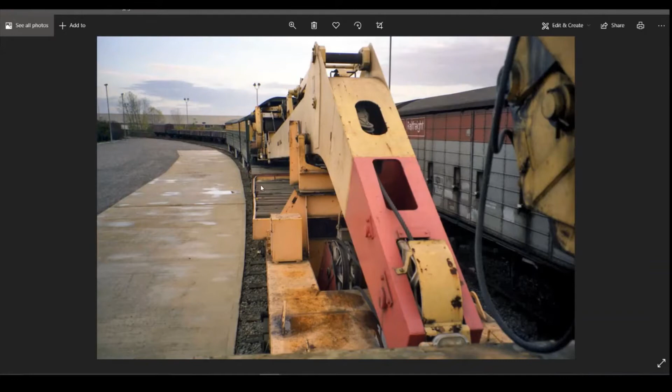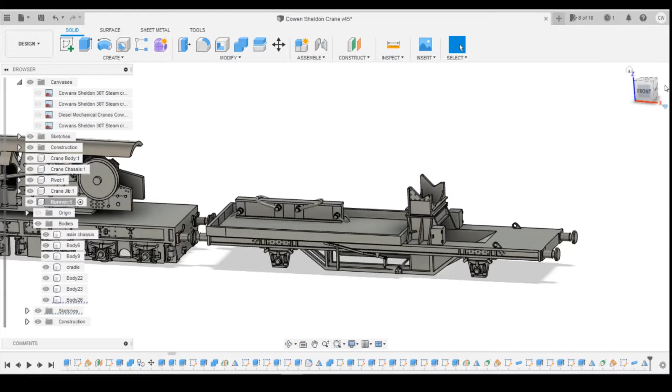In today's lesson, we're going to fill up this hopper here. If we look at the photos we've got, it's pretty much filled with bits of old sleeper that they're using for jacking points. Some are stacked relatively flat - I've got a picture from above showing they look relatively flat, but there are a couple at different angles, so I'm going to show you how to create that sort of random effect. They're not full width sleepers either, they're half width, so they only go maybe halfway across. There's a bit of a gap down the middle, about a foot wide, and they don't fill this whole area up either.

So we're going to start by creating separate bodies, then we'll be copying those bodies across and combining them all as one feature.

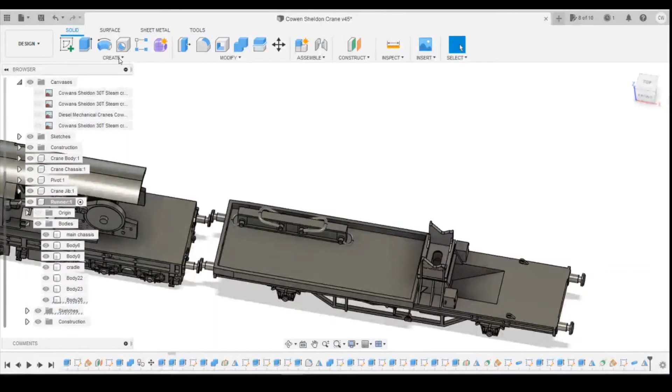If we create a sketch on this inside surface here - I've done a bit of research on the internet and found that the most common size for sleepers is 250mm wide by 125mm deep by 2.6 meters across. So doing the sums, in this corner we're going to have a sleeper that's 1.7mm wide, and I'm going to go for about 8mm in length, since they're cut down, not all the way across.

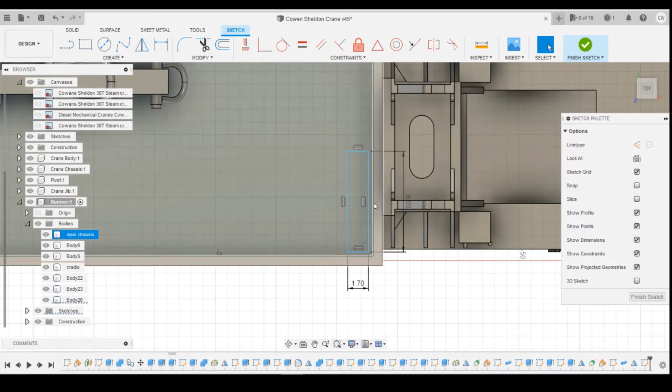I'm not worried about defining its position, it just needs to be in the hopper here. I'm going to extrude it upwards by 0.85, which will give us the rough dimension of a sleeper. Let's create a new body.

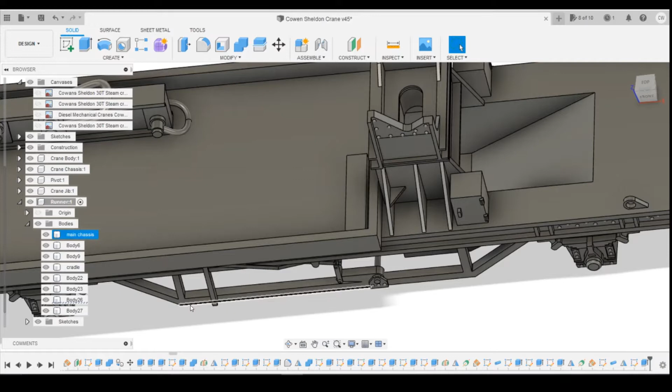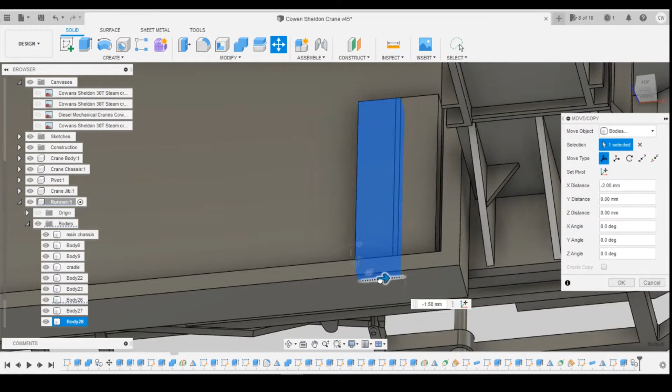Now what we're going to do is just copy these across. If we right click on the body, we can copy and paste it. Do you want them a bit closer? Maybe. You can just go along and copy these all the way down here.

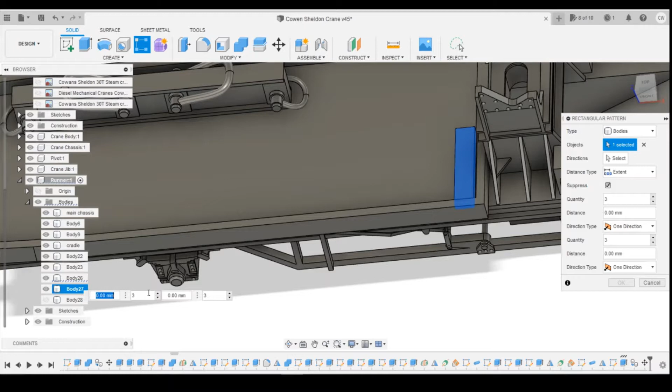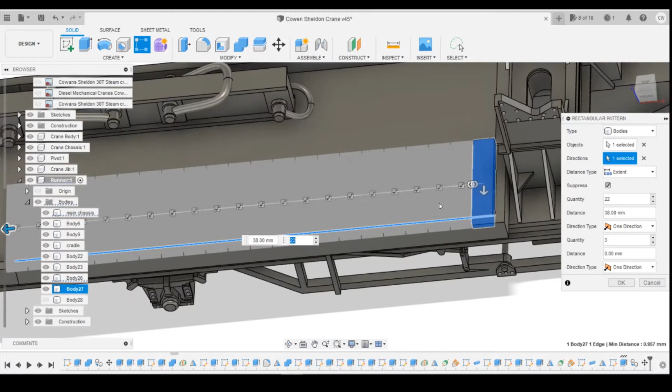The other option is to use the pattern tool to create a pattern off of the bodies. If we create that one, hide body 28 there, select the direction, and fill this up with sleepers - 22 across, 38mm, with a little gap in between them all.

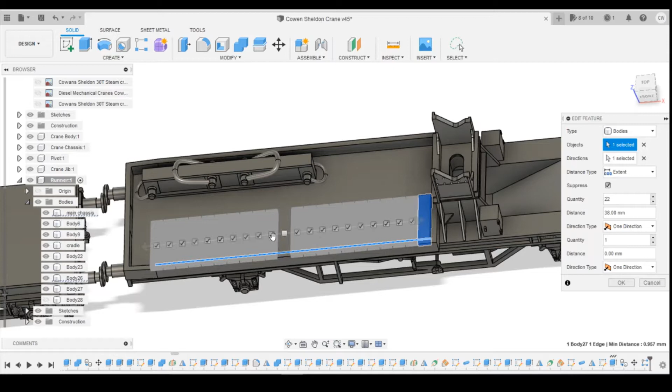Now, to create that bit of random effect, if we edit that feature, let's say we wanted to turn these two off. If we bring this body 28 back up, we can move it - drag it across like this, and then we can rotate it as well.

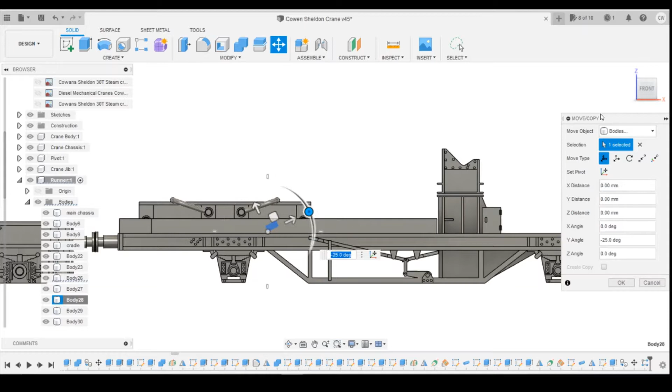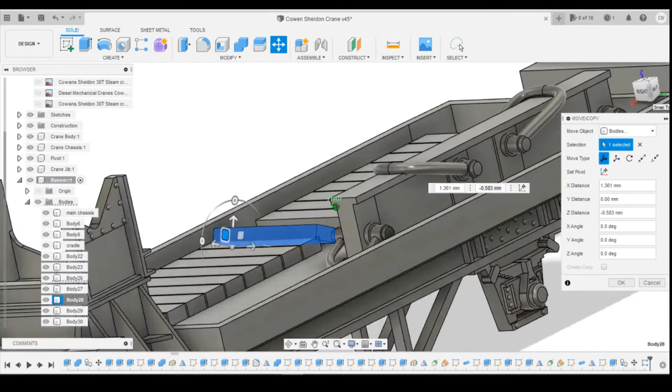Let's say we want this one put in at an angle, where it's been left up against that one like that - left leaning up against it. Okay, make sure it's down enough, let's come down a little bit.

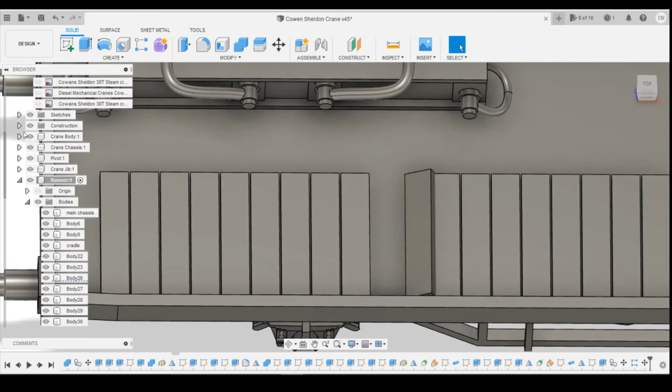What I'm going to do is sectional analysis off of that face, just so we can see its position. That's the analysis turning that on - you can see how it's overlapping this one, but not that one.

So if we edit that feature here, I'm just going to change it slightly so it's now cutting into there - let's do that a little bit more that way, overlapping slightly at that point, creating a bit more randomness.

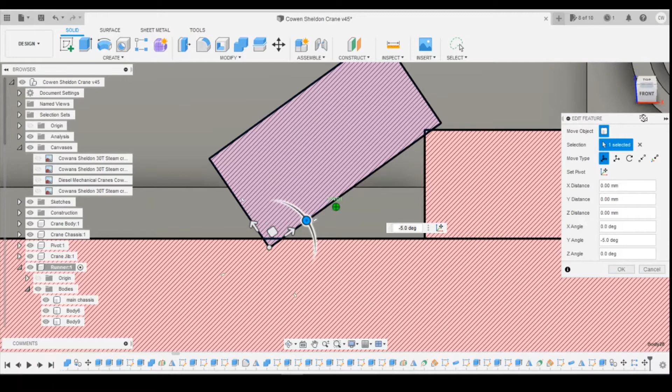That's pretty much level at this point. Let's just drag it across, and it's been dumped in like that.

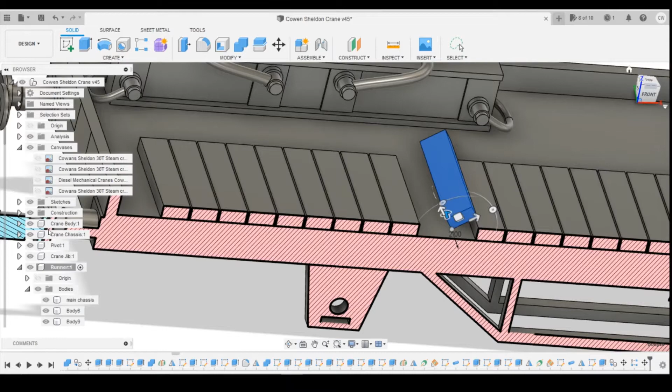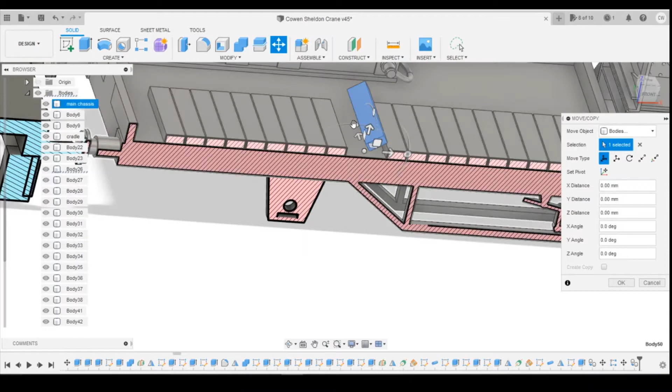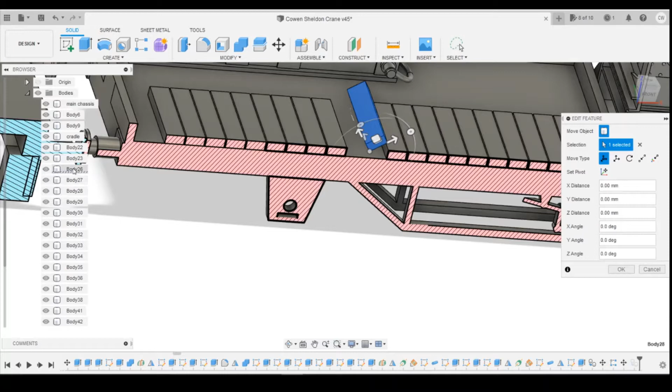Let's create that a bit more random. Ooh, what's it done there? Oh, that's joined - okay, let's cancel that. Edit this feature - that one there seems to have joined, and we don't want that. No, let's just leave it doing that.

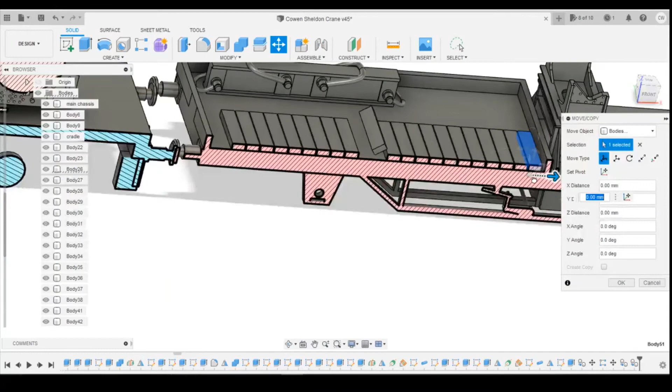We'll just pick up body 27, copy that, paste it. Let's bring this across - yeah, that's independent. Okay, we'll create a rotation that way.

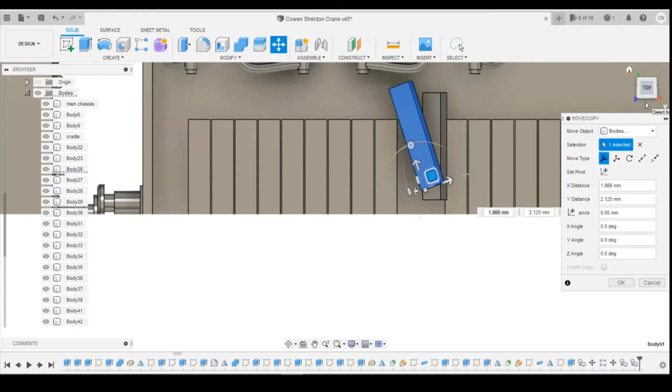You can see what I'm trying to achieve. I'm just trying to make it look like a couple of them have just literally been thrown in on top.

Just touching the bottom there. Probably want a bit more rotation in that direction.

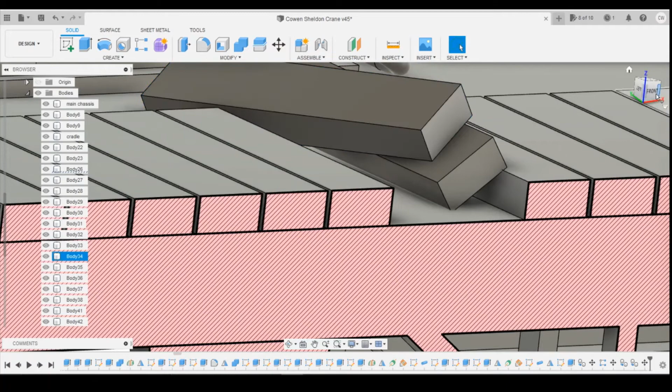Touching that corner - yes, that corner's touching. I want this corner to be touching too so that it prints better.

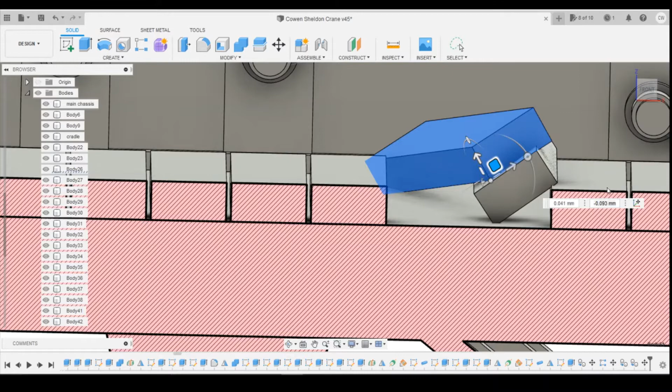So they're overlapping slightly, but you're not really going to notice this in any N-gauge at all. Even in double O, you might not notice. So these two here, I'm liking the way they look, like these two have just been thrown in on top, creating that random effect.

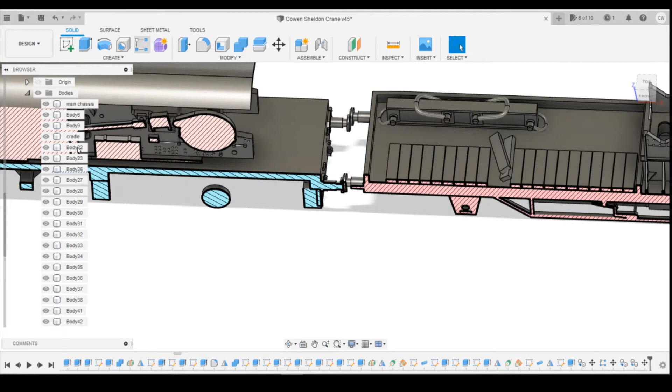Okay, now if we create another pattern here, click the right button, pattern on 27 again, and the direction this time we're going to go across the wagon.

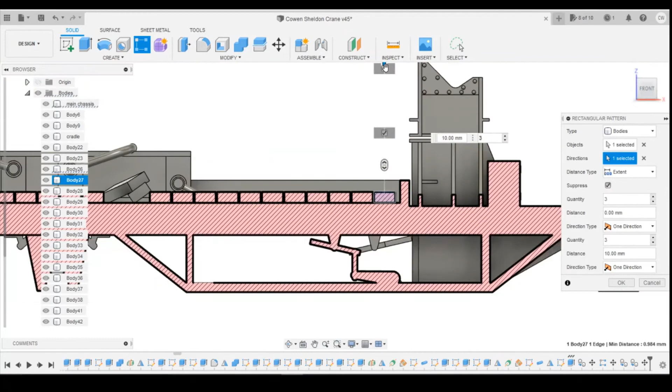Why is that going at an angle? That's a bit weird. Let's get rid of that - that's gone up. That one - so we're going across the wagon.

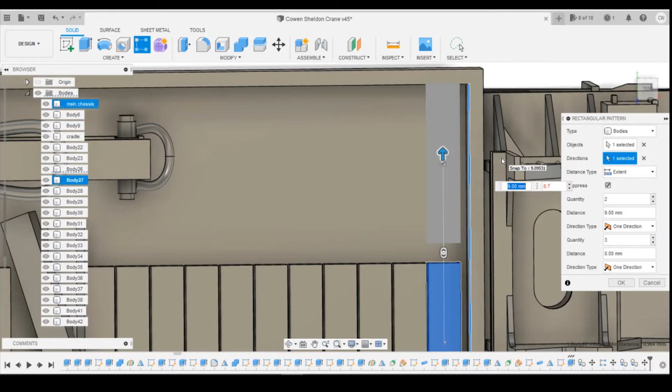Try again - body 27, direction across, two of them, to be 8.7.

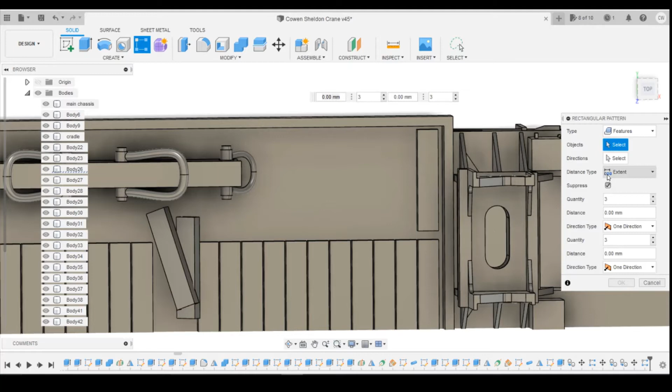Okay, and then I can pattern that pattern, change it to a feature. Select that one - no, it won't do.

Okay, can I go select that body. Yes. Direction.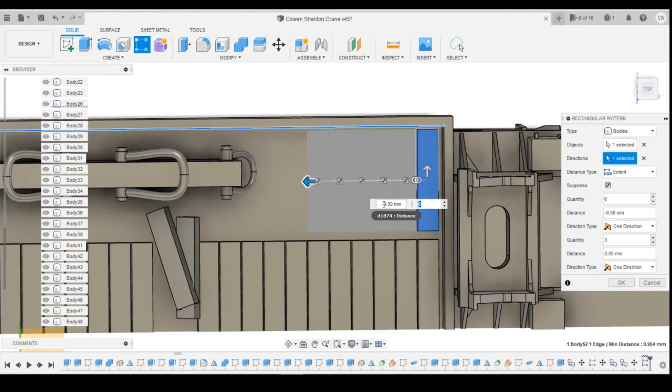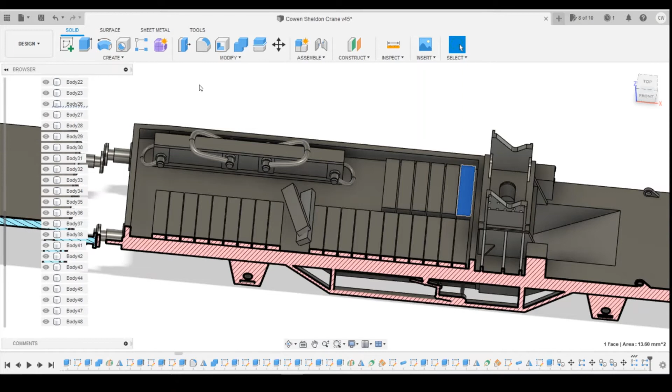Okay, so there we've got those sleepers. You could, let's say we wanted to copy this one back - so let's label that. Body 27 was the initial one we had to start with.

Copy, and then we'll paste it. Okay, and again I'm going to create that random effect of another one just being thrown in on top.

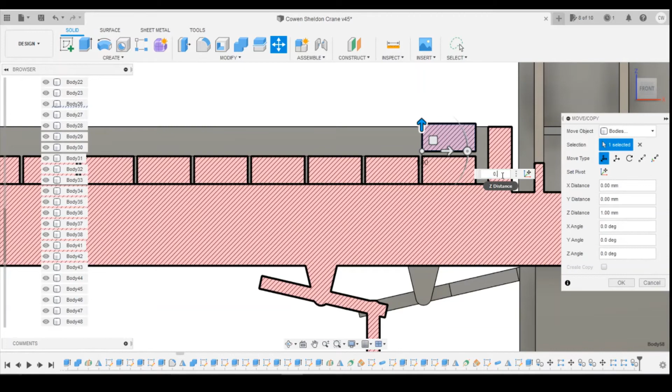I want it to be touching as well, so they were 0.85 - I think we said high. Okay, let's create a bit of rotation on it.

That's the one, that's the one after. And then let's just have that floating on top there.

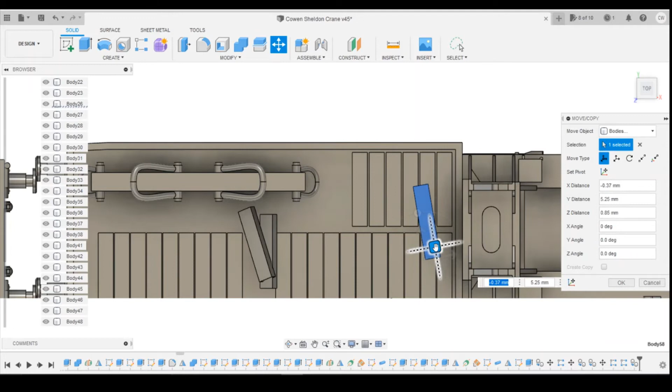Okay, so you can sit here to your heart's content and just throw them in, arrange and rearrange them, take some out. It's completely up to you how you go about this.

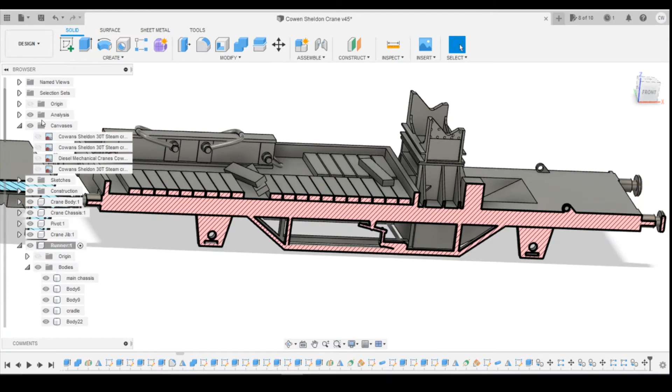Okay, and then what we're going to do is turn everything off except for the main body and those hoppers, and turn the analysis off. So keep the main body, that, and that, the W irons.

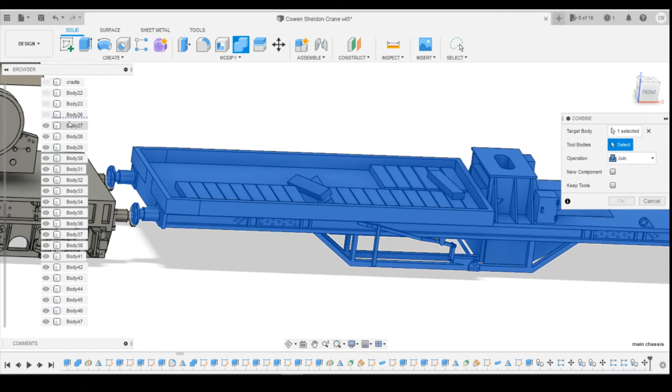Turn off the lifting lug, and then we can combine the main body as the target body, and then the tools - select 27, scroll down, shift down to 58, and tell it OK to join.

One thing I have noticed while just looking at this is when we change the width, it's also changed this hole here. So I'm going to go back and find that and change it in the sketch history. Let's just roll back through these.

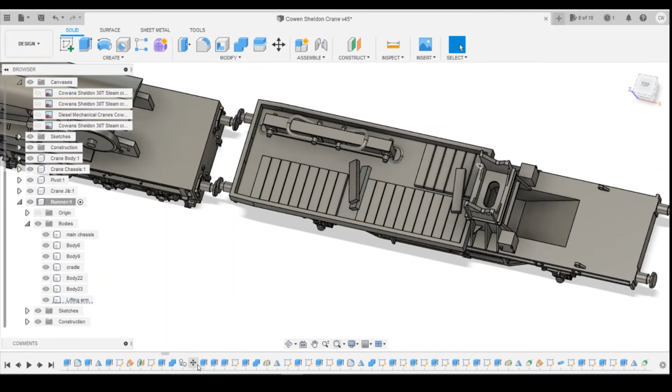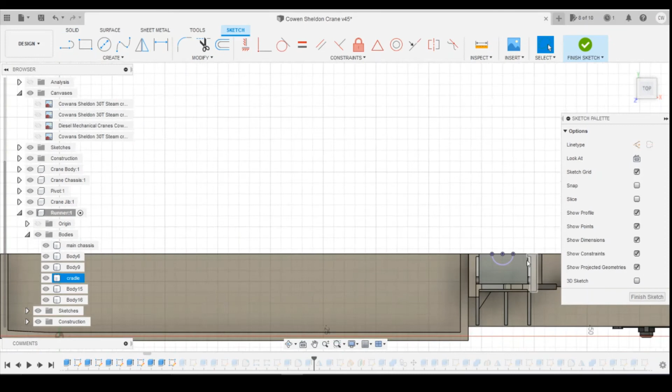Okay, let's go back a bit more than that. Let's make sure that this constrains to there.

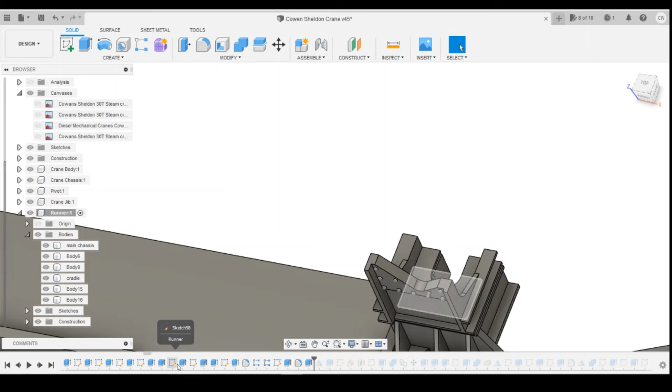Okay, so this one here is causing a bit of a problem, so what I'm going to do is delete that.

Is it already in the bottom? Yes, it is. Hide that cradle.

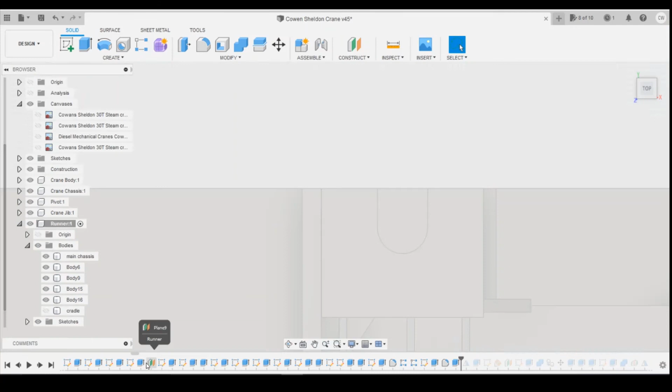Constrained there. Okay, so again, what I'm going to do is delete that extrusion.

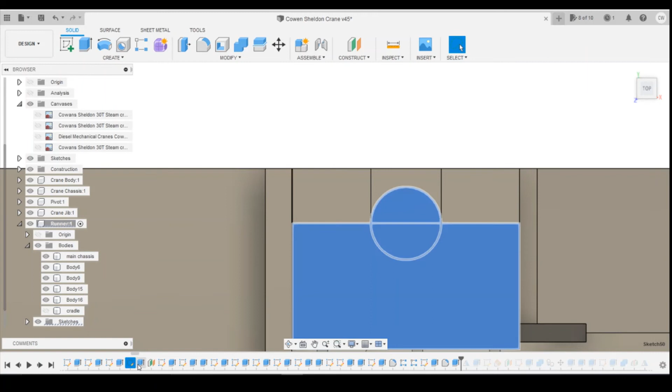Okay, I might not want to do that actually. Let's see if we can suppress that feature instead.

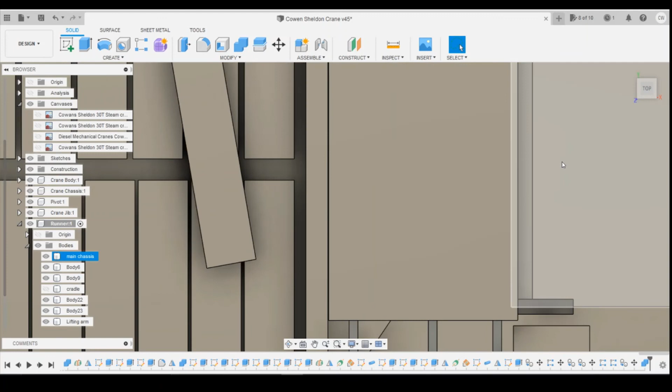Okay, so yeah, that's working. So what I'll do is just drill through on this now, on the top surface.

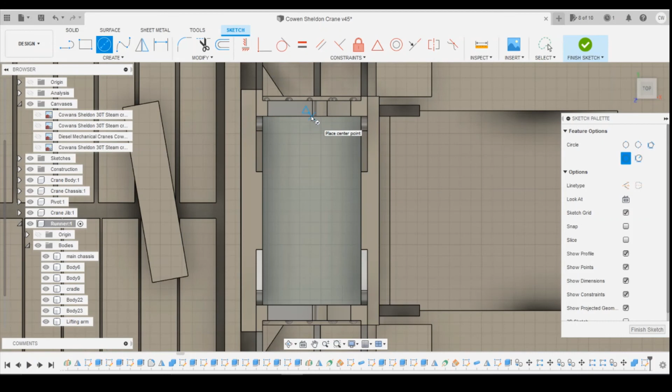So if we create a sketch, we'll find that midpoint. We'll find the midpoint along here as well. So there's the midpoint. I can't remember what size we did, so let's do 2 millimeters.

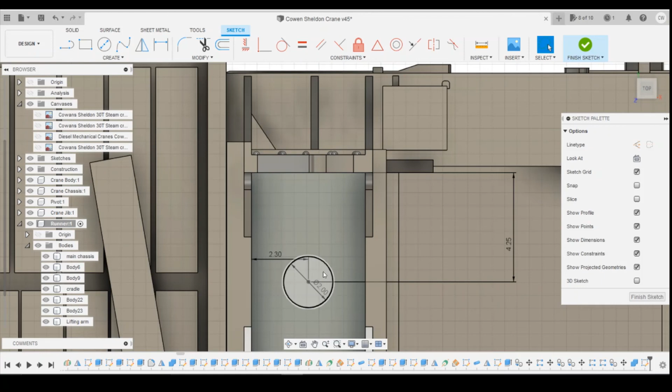Define that, so it's locked into position. And then we can just drill this through with the extrude tool.

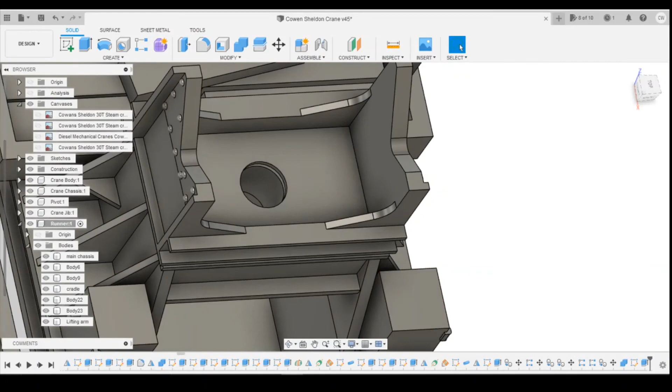Yes, we've got the hole all the way through, that's what we're after. Okay, so that's fixed that.

So I hope you've enjoyed today's lesson - a nice easy one there.